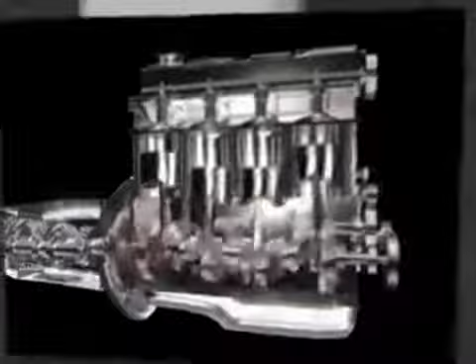Fuel, oil and lubricants, and their effects on combustion engines. Every time an engine is run, deposits are left behind, and these always have a long-term effect on the way the engine functions and its degree of efficiency.

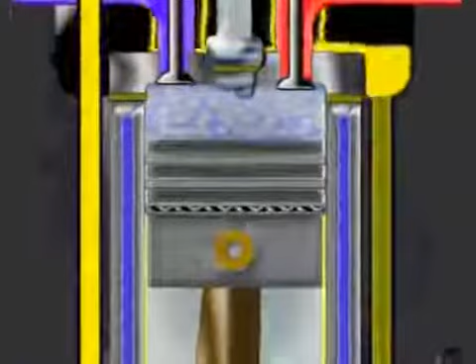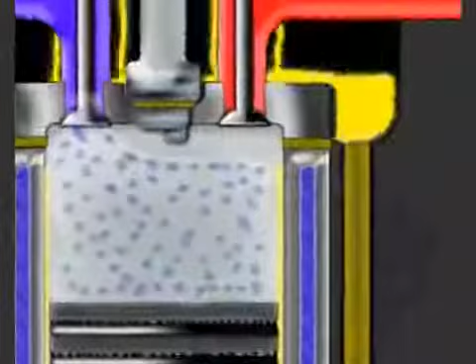In particular, compression is reduced as a result of sediment in the area of the piston rings, oil rings, and their grooves.

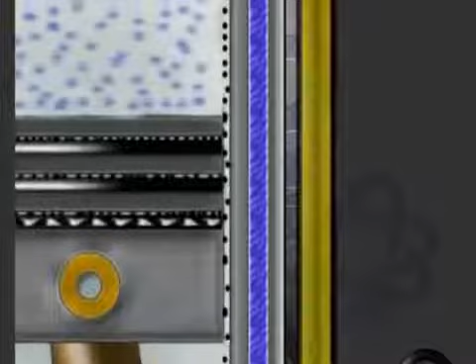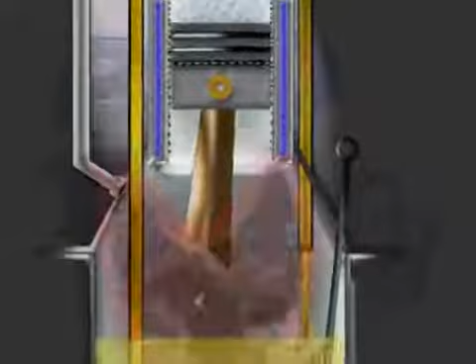The deterioration in the combustion of the fuel-air mixture resulting from this leads to a reduction in the engine's performance. As a result, there is an increase in both oil and fuel consumption. This creates a situation where the sediment caused by the combustion process increases markedly, exhaust fume levels rise, and not least, the wear and tear on engine parts escalates.

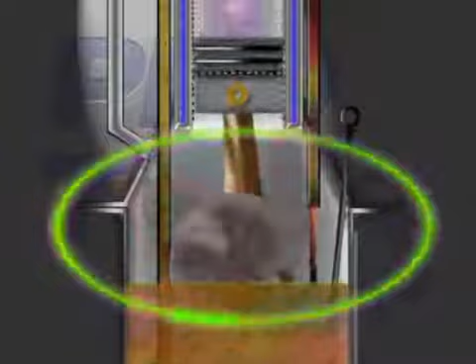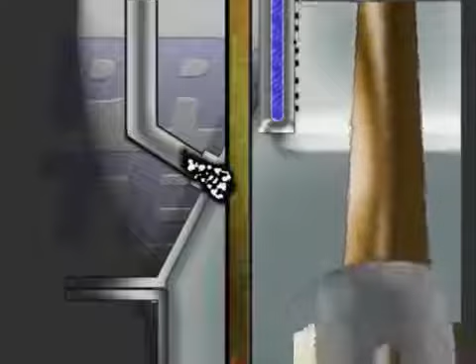Parts of the mixture and combustion gases evaporate in the crankcase and thereby accelerate the speed at which the quality of the oil deteriorates. This can lead to problems in the crankcase breather system.

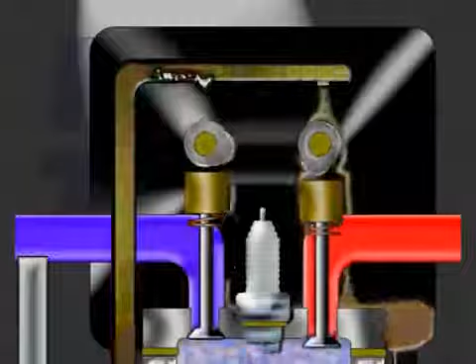Larger particles of dirt, such as the formation of resin deposits in the oil ducts, can trigger a reduction in the lubrication of important components, for example, the camshaft.

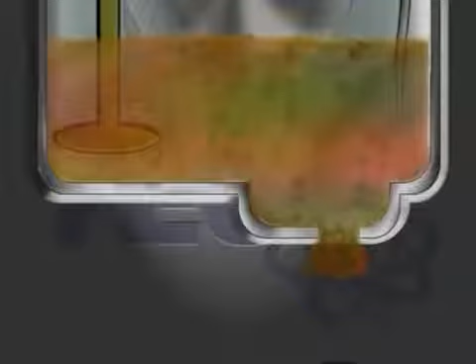Are all these impurities removed by a normal oil change? To illustrate this, let us have another look inside the crankcase. The old oil is drained during the simple oil change process.

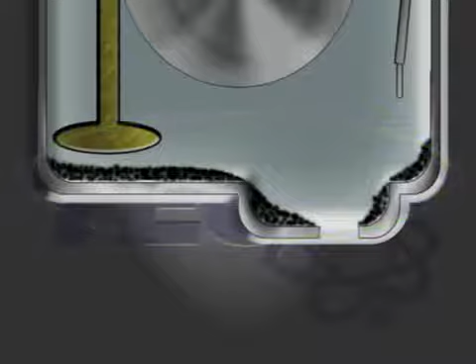However, not all the impurities caused by running the engine are removed when the old oil is drained off. Some of them remain in the form of deposits in the oil and the lubrication system.

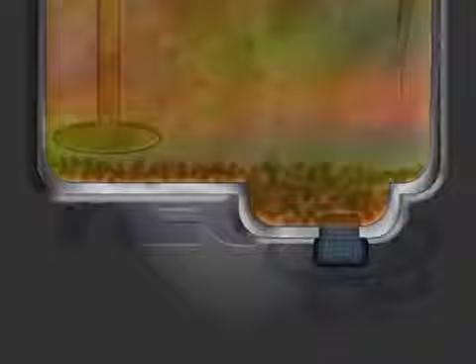Once the engine has been refilled with fresh, clean oil and is then started, the new oil absorbs the remaining deposits, and in a very short time, the oil is once again contaminated. This situation naturally has a negative effect on the efficiency of the new oil.

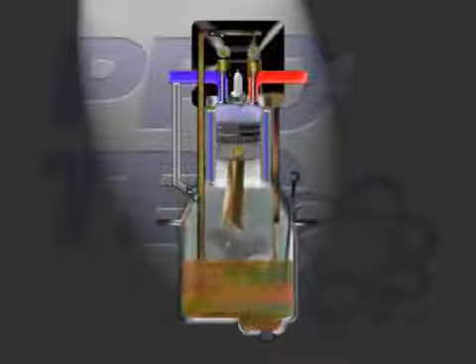In order to maintain both the performance and the economic efficiency of combustion engines, we recommend that the complete oil and lubrication system is cleaned before each oil change.

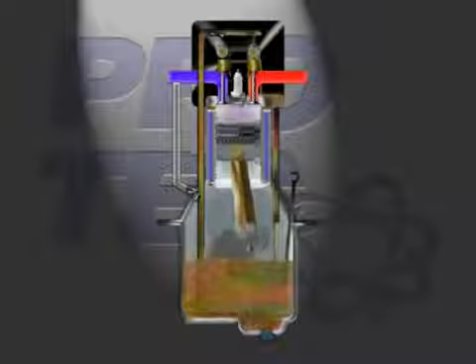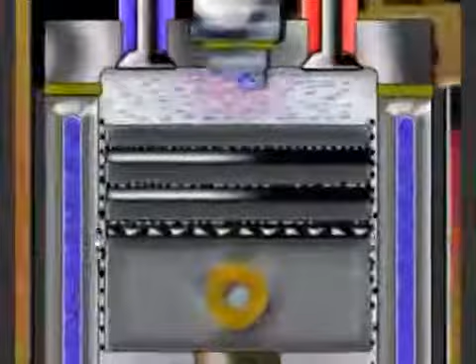After our cleaning agent has been added to the old oil, the engine is run in idling mode for 10 to 15 minutes. During this time, it releases all the impurities caused by running operations in very fine molecules, as shown here at individual problem zones.

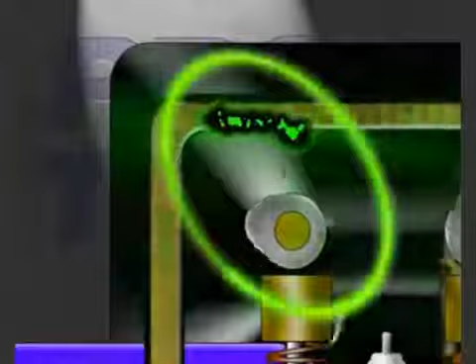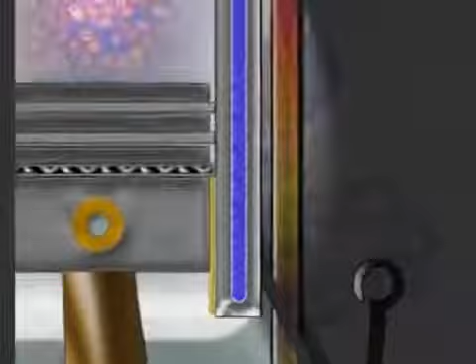In our example, this is the piston ring area, the crankcase breather area, the camshaft lubrication area. At the same time, highly efficient lubricating substances protect the engine during the whole cleaning process.

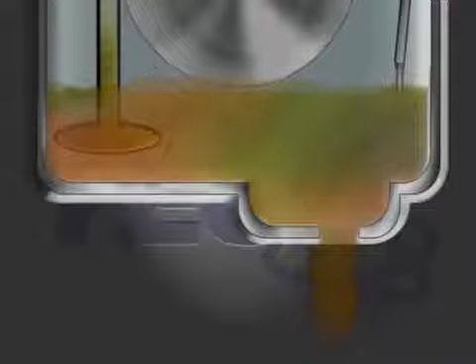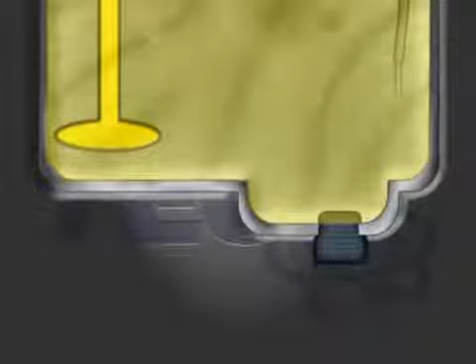Elastomers, such as oil seal rings and O-rings, are kept absolutely supple. All the impurities are now removed when the old oil is drained. This means that the oil and the lubrication system, which we fill with new fresh oil, are kept very clean.

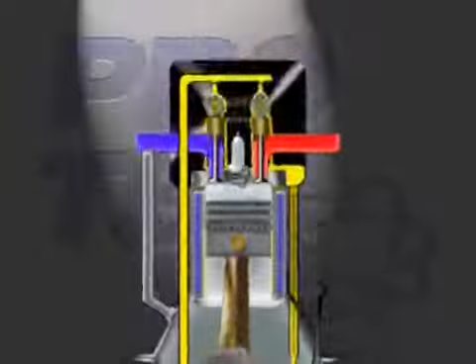Now, the new oil can perform to the best of its ability in a clean environment and fulfill the tasks required of it, such as lubricating, sealing, cooling, purifying, and keeping particles in suspension.

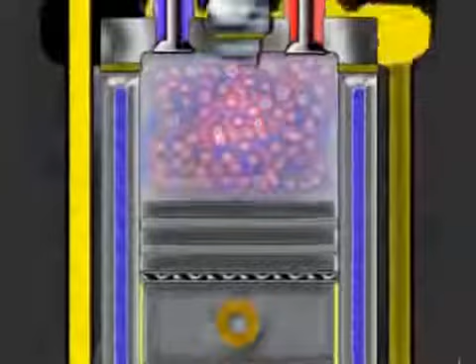The fresh oil is now able to absorb the impurities that have been newly created and is no longer limited in its ability to perform by the old deposits.

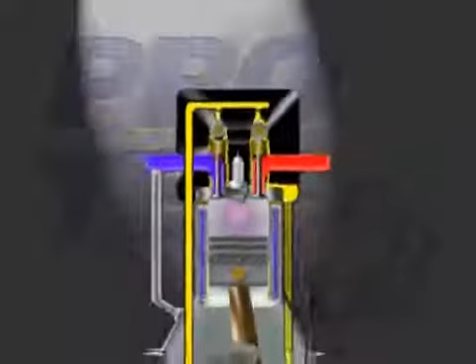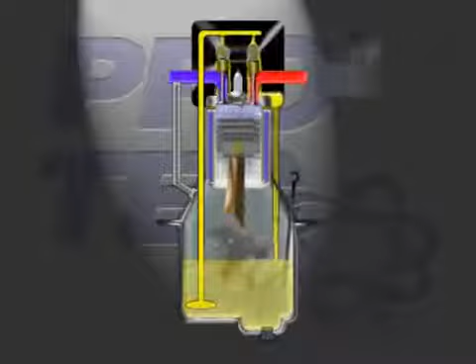As a result, we have new, fresh oil in a clean engine, the best possible oil and fuel consumption, improved engine performance, less wear and tear on parts, the lowest exhaust emissions, and a longer life for the catalytic converter.